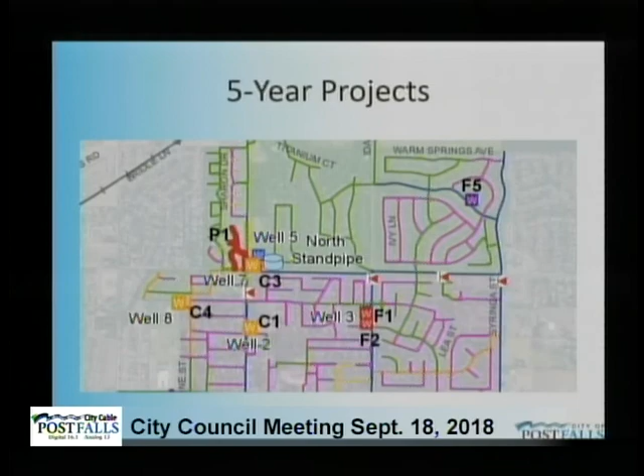This is a little bit north near the cemetery, where well 5 and well 7 are also located. You can see the P1 project located just to the west of that. That's basically upgrading pipes again within a subdivision to ensure fire flow.

You can also see projects F1 and F2 near well 3, an existing well at City Park. That's showing we need additional wells in order to meet the projected future needs of the water system. This is a project we're currently negotiating a scope on, and we'll be bringing that back to you fairly soon.

The last of the 5-year projects are piping projects on Beck Road and Pleasant View Road, basically extending transmission mains for water underneath the railroad tracks north of Seltice.

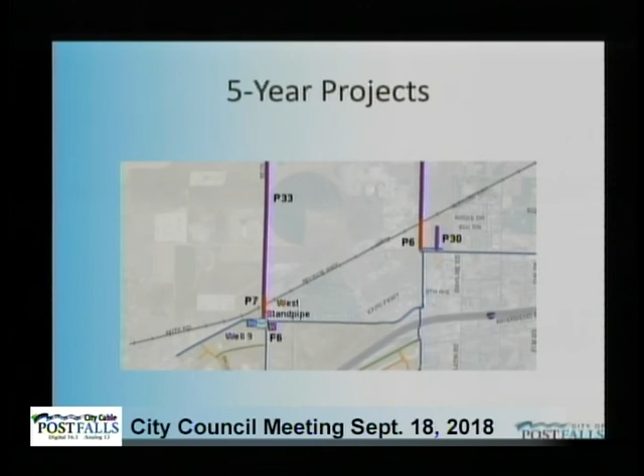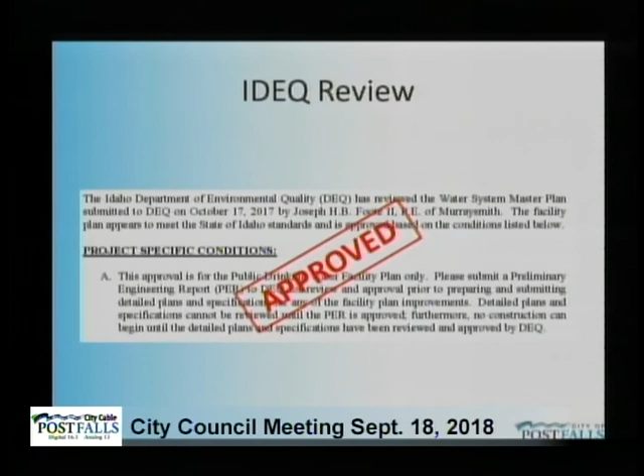I mentioned the Idaho Department of Environmental Quality Review. In order for a master plan to be adopted, the IDEQ must review it. What that allows you to do is go design projects, and when the project is brought back to them for approval, they know why you're working on it. IDEQ approved our plan after a decent amount of review time with no comments other than to make sure we tell them if we're working on a project.

And that is my short summary of the plan. I do have the full document with me, and I'm happy to answer any questions you may have.

Any questions of John? John, I noticed that in the plan, coming up in 2019 and 2020, we've got a large expenditure for a new well, and then there's a well rehab in 2020 and 2021. I'm assuming that's already built into those reserves. We're not going to come back to the citizens and say we've got to come up with an extra $2 or $3 million to do those wells. Is that correct?

Yeah, you are correct in that the assumptions within the plan are taking those projects into account, and that's part of what's spending down the reserves here. In addition, the projected 3% rate increase helps to fund those projects as well. Great, thank you.

Thank you. Do you need a motion on this from us tonight, then? There's a resolution later on the agenda. Thank you, John. Thank you for your time.

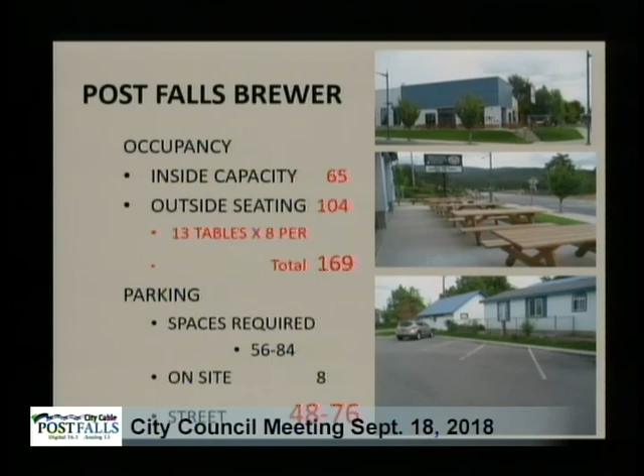That occurred when the Post Falls Brewery became very successful. Their occupancy inside is set at 65, outside they can seat about 104, so you have a total of roughly maybe 169 people there at any one time. I calculated that the space required for parking would be 56 to 84 parking spots, and on site at the brewery they only have 8. So the balance, 48 to 76, end up on the street, and that becomes an issue from a parking standpoint and a safety standpoint.

So I just wanted to give you a little bit of background.

And they used the city center parking plan. If I'd known there had been a meeting on that earlier today, I would have attended that meeting, but I didn't. I understand this plan is preliminary only at this point, and that was per Jennifer.

When you talk to the planning office, they claimed that the reason they only had to have 8 was because for them to have a permit on site, they relied on on-street parking. So that puts it all out on the street.

Might help if I turn the mouse on. Still not working. Maybe we have a dead mouse. Do we have a dead mouse? Oh, there it goes. Okay, thank you.

So the city did install a no parking sign. Let me go back one and see if that skipped one. Go back one. I'll just go back. Oh, use that. Okay, we'll go back one.

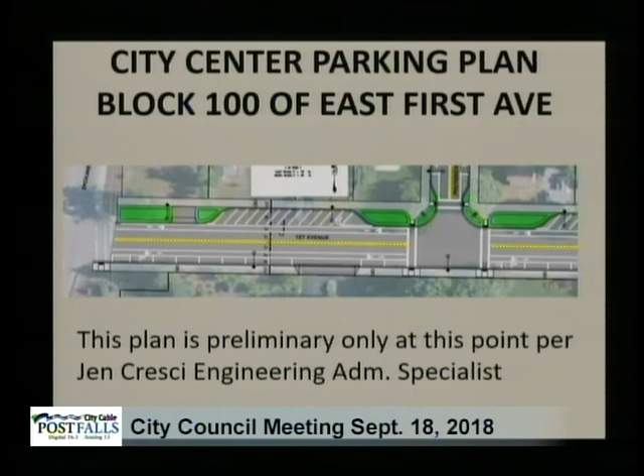If you look at that preliminary plan, you will see on the south side of First Avenue, they show parallel parking. Across from it, they show angle parking, and that looks like backing into parking in that area. Now, the plan that they used, the city has taken those steps to actually implement the street parking. So everything is flooded into First Avenue and also up onto Frederick.

And on the north-hand side, there's not even sidewalks, so people have to walk out in the street. Even people on the south side walk out in the street. But the issue I want to look at tonight is just the parking.

Am I going the wrong way? Sir, I just want to let you know I'm going to give you more time because you had issues, but it's a 5-minute limit, so your time is about... we'll give you an extra minute, but just so you know it is a limit of 5 minutes. What am I, down to 27 seconds? Yeah, we'll give you another couple minutes, so go ahead. Okay.

So the city did come out and put parking signs up. Originally they were small signs. They came out and put larger signs up with red flags. The parking goes all the way down to the fire plug there. And so from those 2 points, that's a no parking zone.

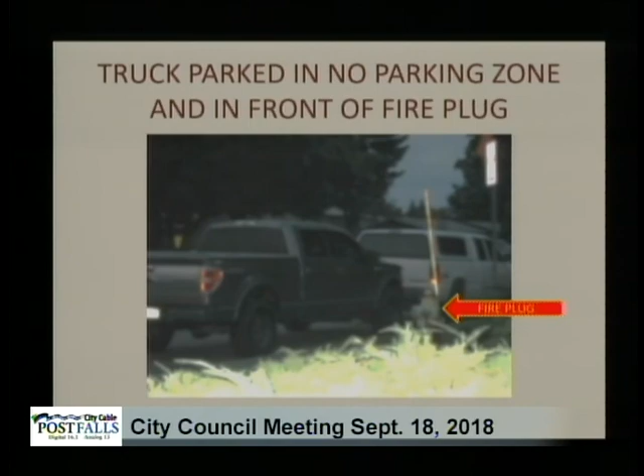Here's a car parked in the no parking zone, and this is where the safety issue comes into point. We cannot see the cars coming down First Avenue, coming off of Spokane Street. Just can't see them. So there's 2 cars that are parked, sometimes even out into our driveway. Here's 2 cars parked there. Here's a car or a truck parked in the no parking zone and even in front of the fire plug. Now, what can be done to resolve our safety issues?

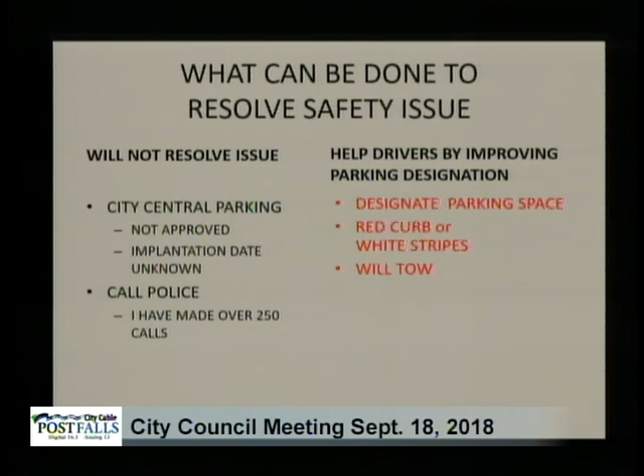Well, the city's central parking plan won't solve the problem right now. The implementation date is unknown. You don't know when you're going to implement that. Calling the police is not a solution because the cars, when they ticket them, may be there for another 2 or 3 hours. And so we still have the visibility standpoint where we cannot see to enter First Avenue. And calling the police really is not the solution.

I've called them over 250 times. They respond. A lot of times the cars may be gone, other times they're there. So some of those solutions, I think we need to help the drivers. It's a driver issue. It's not the brewery, it's not the city central parking plan, it's the driver.

And we could improve the situation down there by parking designation. One of them would be to designate the parking space. Another one would be a red curb or white stripes. Another one would be to add to those signs, will tow. Now, I think people would probably still park there.

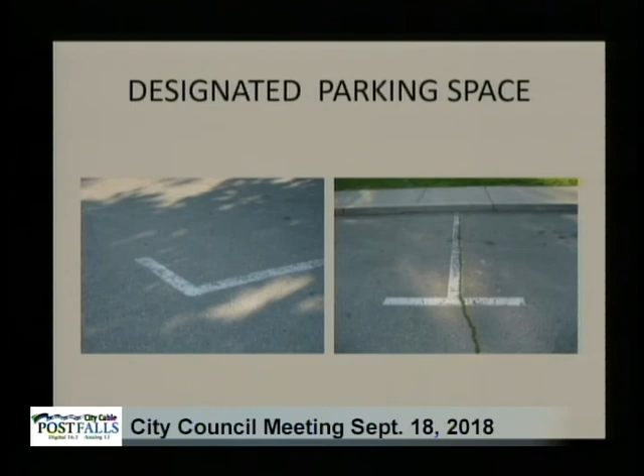So here's a designated parking space where you have like a T where it shows 2 parking spots. You could start it right there by Spokane Street where there is a no parking, and run it up to our no parking area, which would be like on the left the start of it and then the finish of it where they could park.

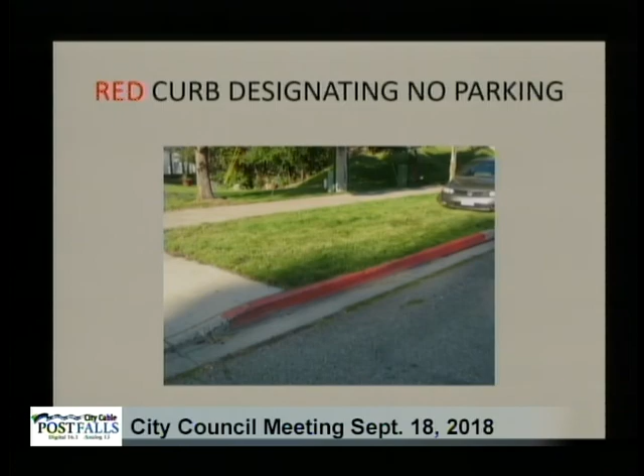The other option is to paint the curb red. Now, we've been told by the city several times we don't paint curbs red. Well, guess where this red is? It's on 4th Street, at the Falls Park Apartments. I've been down there several times. Nobody parks in that red spot. And I was told that was painted by the city.

We've requested that and been denied, but that would help solve the problem. The other one, also on 4th Street, is where they've got white stripes, and they've actually got a sawhorse there. I think on this particular one, it states it's backing in parking, so the other one would be vehicles will be towed. I think there's some people that would park there anyway, even just for a minute. So let's get it done, a team effort of what we can do down there.

This is something that really can't wait until the city's central parking is resolved or they do the planned parking down there on First. We needed immediate action on there. I can't tell you how many times it's been very close calls. So I just ask for some consideration within the right department to look at this issue. It is a serious safety issue that we have down there.

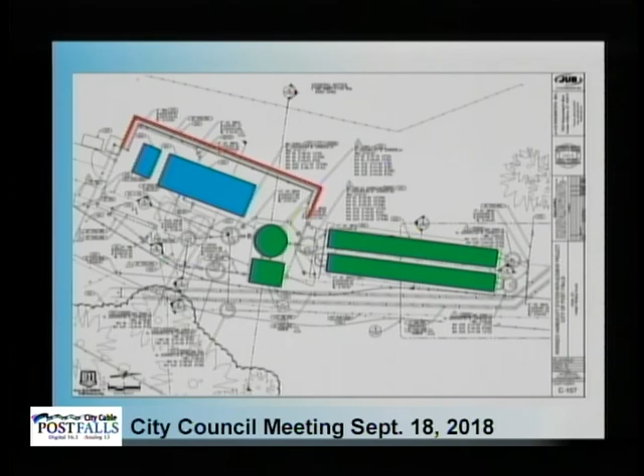The green circle and square is our new wet well and valve vault. It's worth noting that compared to our previous lift station designs, on this project we thought it would be a great fit to use precast structures, which had the benefit of an expedited construction schedule compared to a cast-in-place process that requires a lot more time.

And then the longer rectangular shapes—similar to that idea and principle of speeding up construction—the overflow basin will be constructed out of 5-foot diameter HDPE pipes connected together, as compared to a cast-in-place project.

You can see there's a lot going on in a small space. There are some site constraints. South of the shapes there is a through driveway that goes through the site, providing access for the HOA members to their community park, then exiting at the northeast end. During construction, we will separate this site from the HOA member site so they'll have access to their park throughout construction, and the contractor will be limited to this area only.

As I mentioned, we opened bids on September 5th at City Hall. We received 3 bids: Halmy Construction, TML Construction, and SNL Underground. The apparent low bid was from Halmy Construction, in the amount of $1,080,000.

Following the opening of the bids, JUB provided a review of the bids in compliance with the bidding requirements and documents. You'll note in the first column, the highlighted portion at the bottom next to HVAC, Halmy listed a subcontractor for the HVAC work that, after JUB's review, was determined not to be licensed to perform that work. The second issue identified in Halmy's bid is the absence of a contractor listed for plumbing. Under the Idaho Code, as listed in the bidding documents, it's required that a licensed plumber perform this work. Worth noting, TML Construction and SNL did list a plumbing contractor in their bid forms.

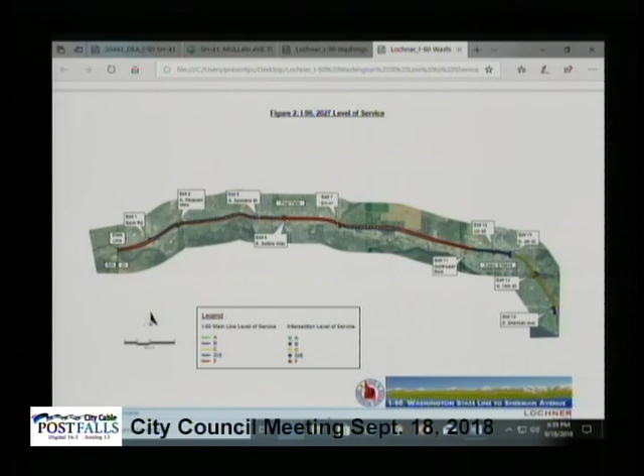The next slide is what the level of service is in 2027. You can see that it goes red, which is level of service F, stop and go traffic at our peak hours, AM peak, evening peak, and also what we're starting to experience is a third peak, which is a mid-afternoon peak. So that's dead stop, moving incrementally through the corridor.

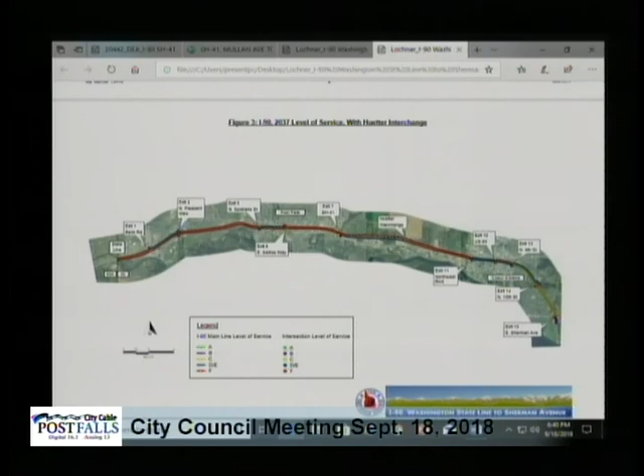And then moving on to 2037, this one would be with the Huetter build-out, the additional north-south route that is in our vision in the future, when we're not sure, but it is out there. It'll be a controlled access system that'll go from the interstate along Huetter up through the prairie and attach to Highway 95 up north, so it'll be that additional route north.

Some of the potential solutions are, we can go one by one. Solution D is to signalize the westbound off-ramp at Seltice Way. Another one further up the line is to signalize the eastbound off-ramp at 15th.

Next one, C, Spokane Street to SH41, add an additional lane. So here we go with our third lane on the interstate, so we can increase capacity on the roadway and start to see that level of service drop off.

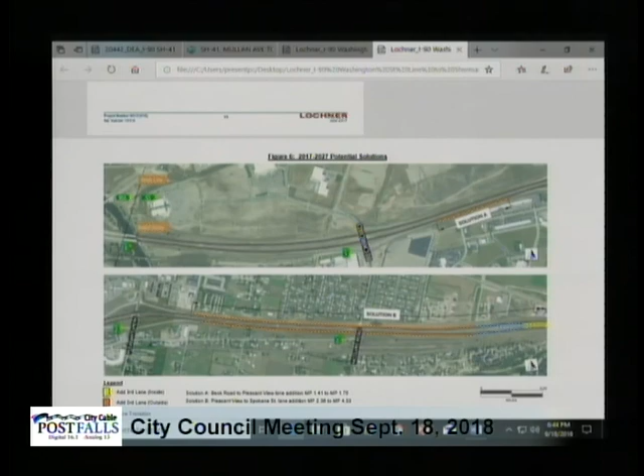This here is just some graphics of adding the third lane, and it's going to go on down the line. The first solution is, of course, at Beck Road to Pleasant View, adding a third lane there. That's solution A. Solution B would be from Pleasant View interchange to the east, a third lane on both bounds.

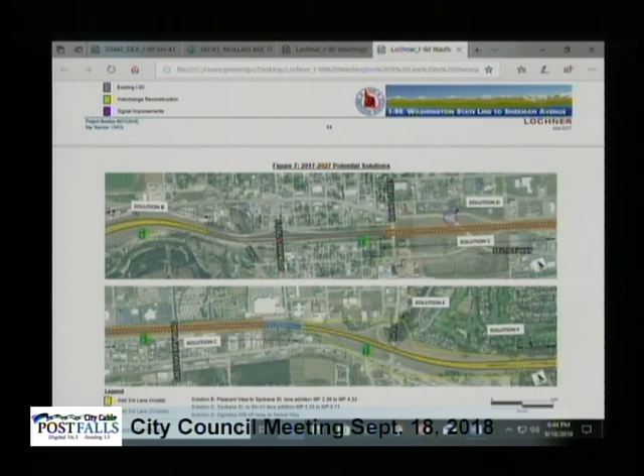And then this one here, Pleasant View to Spokane Street, that's the one we talked about, add the third lane. The orange is adding a lane to the outside, yellow adding it to the inside. We do have some issues with some structures out there that'll have to be widened as well to address that.

2017, 2027 potential solutions, and again, it's about funding. How are we going to come up with the funding to do 15 miles of a third lane on the interstate?

Pleasant View, or Pennsylvania and Sherman, we're getting further east. So I'd just like to show Mr. Mayor and members of the council that we are looking at what to do and how to address the problems that we're experiencing on the interstate already.

It is in the future. It's a matter of when, it's going to happen, not if. It has to happen. We're looking at projected volumes out here, just in the Post Falls urbanized area on the interstate, in 2037 of nearly 100,000 vehicles on the interstate as an ADT. That's one day, an average annual daily traffic. We're looking at 100,000 vehicles. Right now, we're experiencing in the summer months, I think the high this year was around 68,000. So it jumps drastically.

We have a public meeting tentatively scheduled for November 7th, somewhere in that week, to present our preferred alternative or alternatives to the public, and then another one scheduled in the summer of 2019 after preliminary design.

Right now we hired DEA to perform the design and alternatives analysis for us. We started with 8 different alternatives, and this week we're doing a value engineering session to pare down our alternatives to about 2. We have several local stakeholders involved, including Bill and Rob from your engineering department. They've been there and plan to be there for the rest of the week.

We're evaluating alternatives based on safety and operations, because this is really primarily a safety project, and we want to make sure it's something that will operate well in the future. After that, we're looking at what fits those parameters with the least amount of impacts and the most cost-effective cost-benefit ratio. Our total impacts aren't known yet, but we're fairly low impact on the alternatives we're considering right now, and we'll still accommodate Seltice as an east-west arterial, 41 as a north-south arterial, access between them and I-90, and bike and pedestrian movement throughout.

So I wanted to show you 4 of our alternatives tonight. These are pretty much almost napkin sketches at this point, so there's still a lot of tweaking and optimizing we can do on all of these. But I want to show you the direction we're going with this. The first alternative is more of a system interchange, like you'd see between two interstates. Does this have a laser on it?

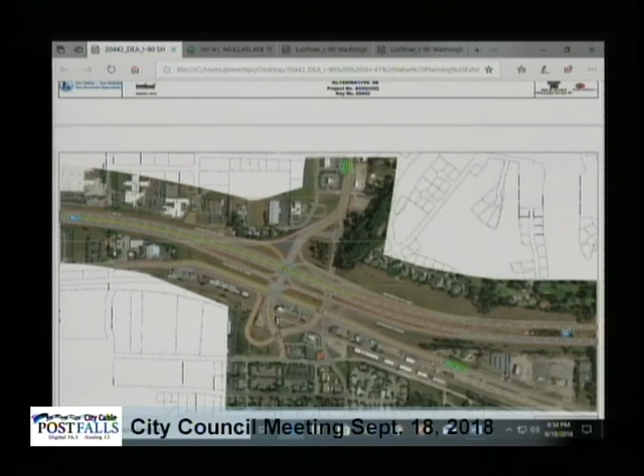Then the last one utilizes what's called a single point urban interchange. It's very similar to what we're putting in at 53 and 95. Boise has also put several in. It's kind of an up-and-coming interchange design because it works well in these built-up, tight environments, because you control the interchange from one signal, so the signals perform better throughout there.

Key functions of the several different SPUI types we're looking at is that we'll take Seltice through traffic up and over 41 to maintain that more efficiently, and then the rest will be diverted down through some sort of jug handle around Herborn or Ross Point. That's all still being optimized because there's a lot of tweaks we can do there, and we're working closely with Rob and Bill to look at all those impacts.

So that's basically where we're at on 41 in a nutshell. We'll have a public meeting early November, so that notice should be coming out shortly, where we will present the results of our value planning session to the public before we make a final decision on our alternative type.

So if you guys have any questions on this before I move into some construction... Just remember last time we looked at about 7 different alternatives. I know, so hopefully these will work out better. Yeah, and that's really kind of one of our goals too in this, is to do it right, so we aren't coming back here again in 10 years to say, okay, this didn't work, what are we going to do now?

I wanted to update you on a couple of construction projects we have on our system in Post Falls. The first is a bridge repair project. Braun Jensen out of Payette is doing it for us. It's a 2-season job. The first season we're building crossovers at Huetter for next year, out by the weigh station there. We've got all that earthwork going on, and we're also resurfacing bridge decks in Post Falls.

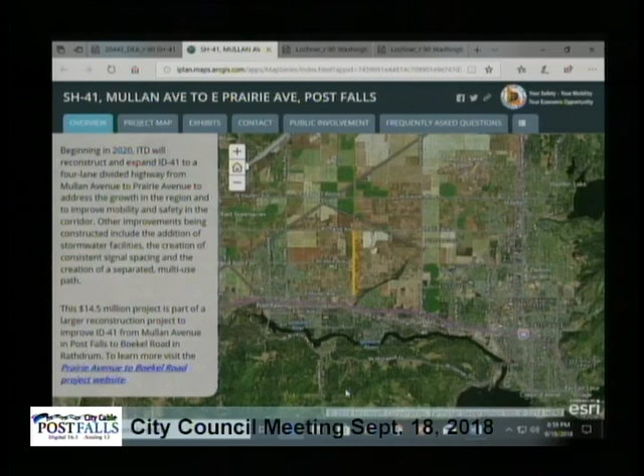So we can move on to SH 41. I just put this on here, a link to our public-facing website, and it'll give you information on the projects themselves. There's actually 4 projects out there: Mullan to Prairie, Prairie to Lancaster, Lancaster to Boekel, and then a signal at the intersection of 41 and Lancaster.

What we're doing out there is going to a 4-lane divided median system, signals on the half-mile, with some placed during the project in 2020. A lot of the roadway and infrastructure within the Post Falls city limits will be constructed back 1,000 feet on either side of the roads as well, the signalized intersections and also some at the quarter mile.

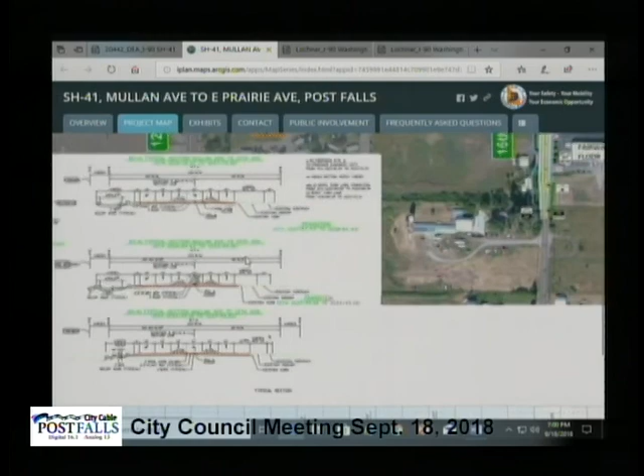This site will give you a project overview, the project map, and it'll allow you to zoom in on the particular intersections and the typical sections of the roadway itself. The portion from Mullan to Pole Line won't have a grass median, it'll be a raised median divider out there.

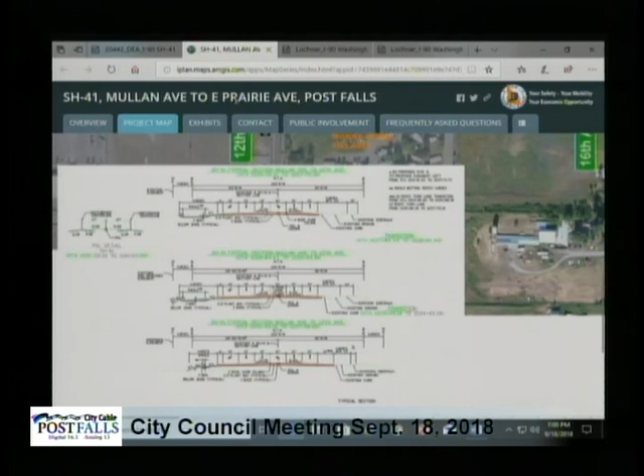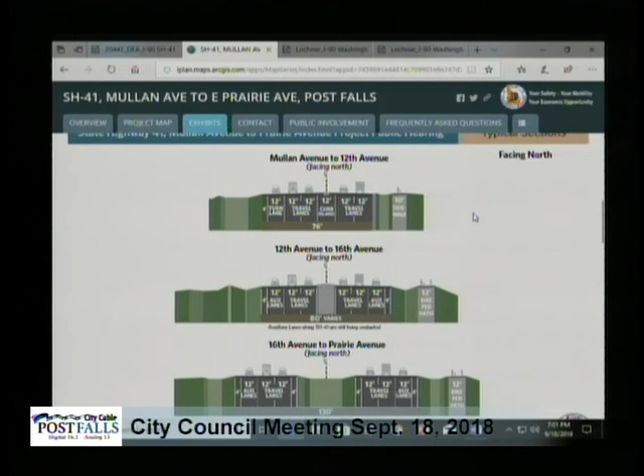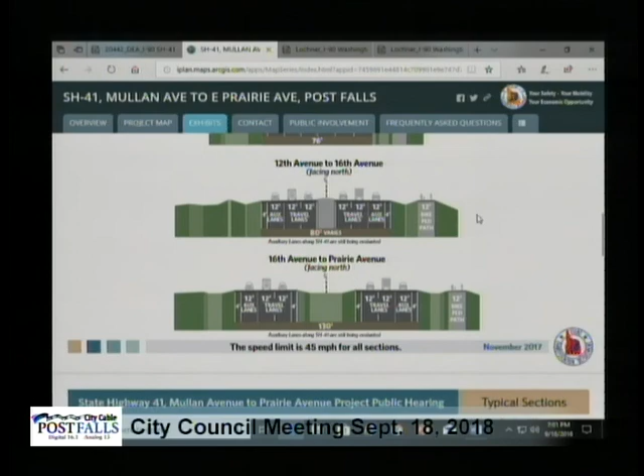So we've got some exhibits of the project. Here's our typical section from Mullan to 12th: 12-foot travel lanes, sidewalk, shared use path between 12th and 16th. Then continuing up past Prairie, there will be a shared use path on the east side of the roadway for the length of the project.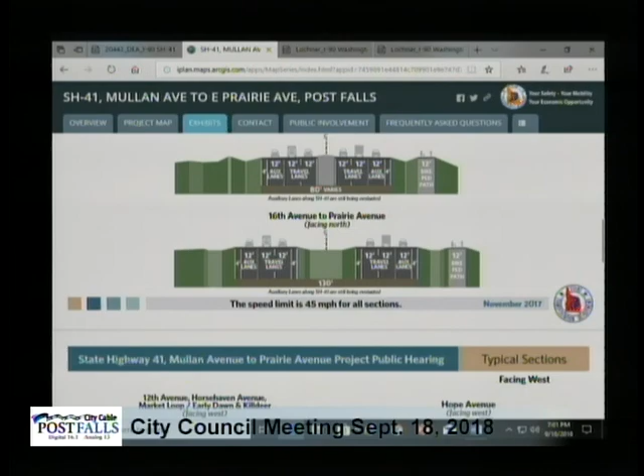We did get a freight grant to build a grade separation at the UPRR main line, so we won't have to deal with that crossing, stopping when the train has it active. We're in the process now of working with the AmeriGas facility on Prairie on shutting down the spur line that bisects 41 as well. So with the elimination of those two crossings, it'll be a clear shot all the way up to Rathdrum.

So I've got another one. I don't see the other one here. Anyways, I have another link to the other projects to the north. This one's just Prairie. Hey Rob, I don't see that one here. Is the Word doc open? Oh, here it is.

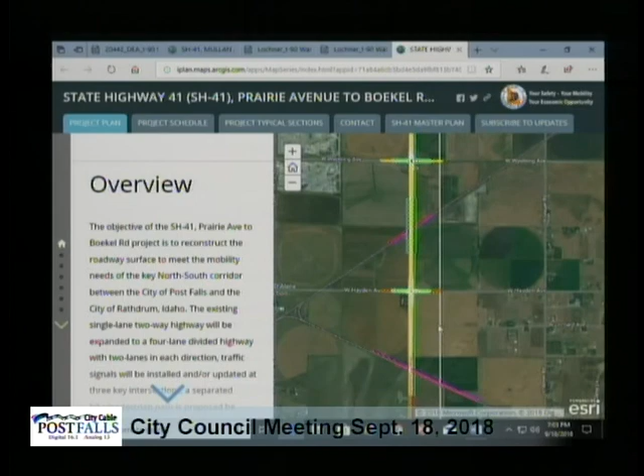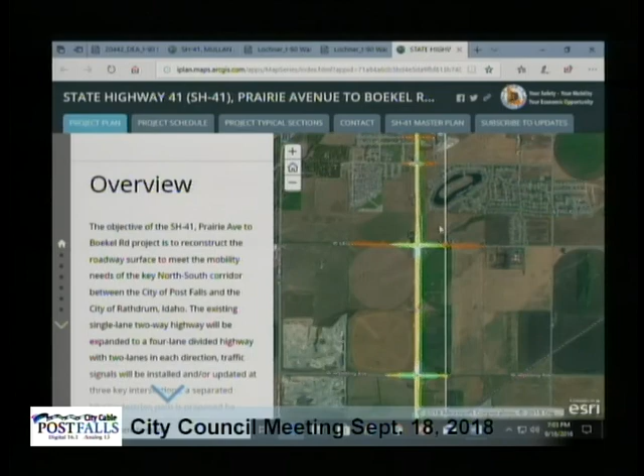There's the Prairie to Boekel section, which starts at Prairie there, and then the signalized intersections. We'll be replacing the signal at Hayden. No signal at Wyoming at this time. Signal at Lancaster, signal at Nagle, and a PED tunnel at Nagle is planned for the project. And then we'll be terminating the project at Boekel.

And we've had a lot of questions about the southern portion from Seltice to Mullan, which is going to be addressed in the planning stages, in the early design of the interchange. We're required to look at that section, and we have funding programmed for that for 2025, so those projects should overlap as well.

John, am I missing anything? I think you covered it, I think the biggest point that was brought up is it's still on track for right of way.

Any questions? I was just going, when I was looking at, so the bike trail will be on the east side, 41 then, just one side? On the east side. Okay, yep. Al?

You mentioned the port of entry, moving the port of entry. Why is that necessary?

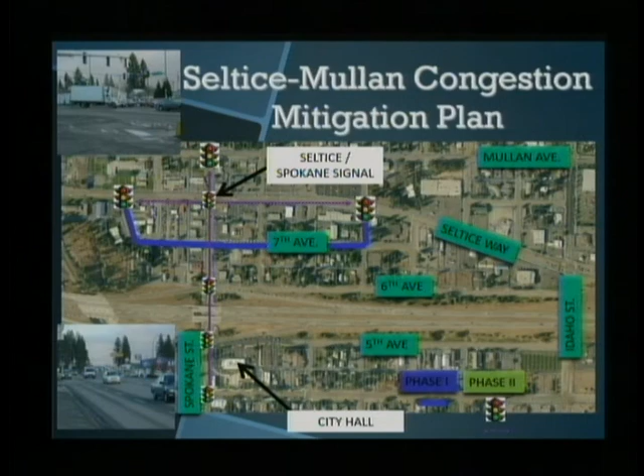Phase 2, which we have under construction right now, involves the construction of 3 traffic signals at Compton and Seltice, Henry and Seltice, and then Mullan Avenue and Spokane Street. Phase 2 also involves the placement of fiber optic cables to connect those 3 traffic signals, along with 4 existing traffic signals to here at City Hall, where we will have the ability to access those signals, make modifications to timing, and monitor them if there's a complaint about traffic backups to see why that's going on. That will also be able to be done down at the street department, as well as we are trying to work with the Idaho Transportation Department so that they can also monitor those signals.

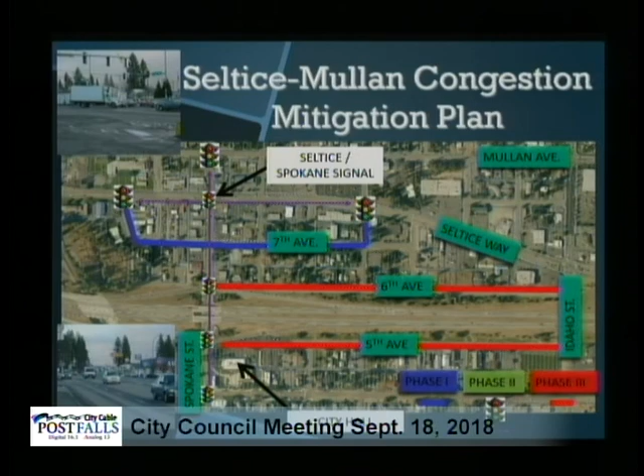4 of those 7 signals will belong to ITD at the completion of this project, and the other 3 belong to the city. Phase 3, per the Seltice-Mullan Congestion Mitigation Plan, was to make some modifications on 6th and 5th Avenue. Our 2017 Transportation Master Plan update indicated some alternative solutions which may be more cost-effective and have a better return on safety and efficiency of the transportation system. We will be looking at trying to get that started in 2019 as far as planning level, coming up with a good plan and the cost on that.

So where are we today on the Seltice Mullan or Seltice Congestion Mitigation Project? Planning started in 2008, design started in 2012, and we finally got to construction and had funding approved to go out to bid this year.

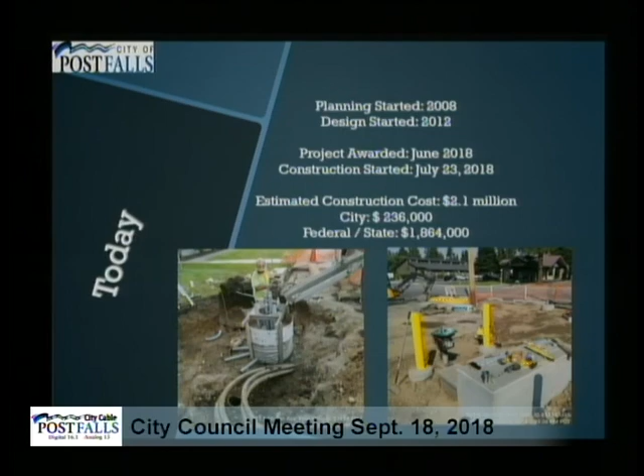Construction started July 23rd, with an estimated cost of $2.1 million, of which we are participating from our transportation impact fee dollars about $236,000, or roughly half the cost of a normal traffic signal. We're getting 3 traffic signals and a lot of communications capability and modern technology to operate these signals.

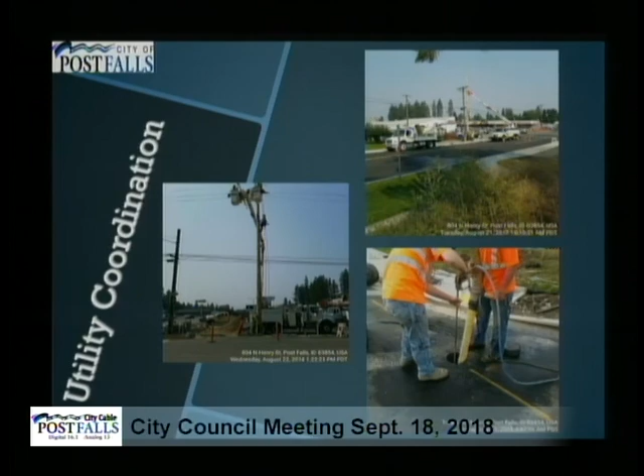So far, our contractor over the past couple months has been doing a lot of utility coordination work. There's been some new power poles that have had to be put in, raising power lines so they're out of the way of traffic signals. Fat Beam, Frontier, Spectrum, Avista, they've all had wires that they've had to relocate and move.

Underground work. A lot of the work that we're doing this fall is stuff that's going to be underground. People aren't going to see it or really even notice that it's even there when it's done. We're putting in foundations, putting in vaults, a lot of concrete underground. And then there's miles worth of fiber optic communications. It may be a short distance between City Hall and Spokane Street and Seltice Way, but it still takes a lot of fiber optics to communicate and connect to all those signals, get around the corners.

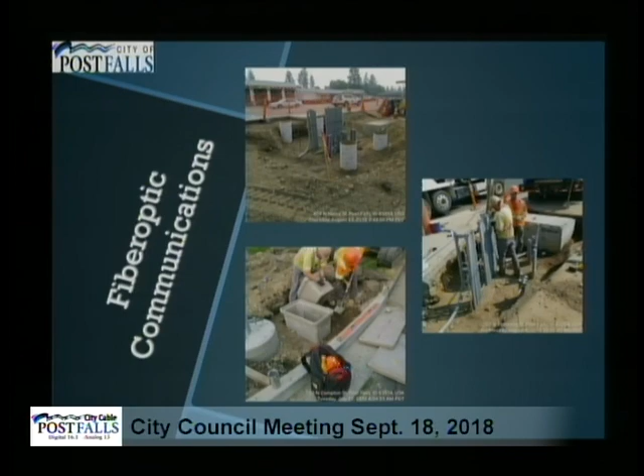ITD did a lot of front work back in 2014. They laid a backbone line from 4th Avenue all the way up to Mullan Avenue, which has helped keep the costs a little bit lower on this project, even though it is $2.1 million.

Surface repairs are also going on. We're modifying some of the curb returns so they can fit the desired design vehicles. And then as they put in their fiber optic communications and foundations, they have to modify storm drains and get everything back to a good operational condition prior to this winter.

One of the drawbacks—well, actually, as you're doing a project in a downtown area, sometimes we find historic artifacts. Over at the intersection of Henry Street and Seltice, we started digging down to put in a foundation for the traffic signal. We found underneath the section of roadway that we were tearing out an old dry well, right at the location where we wanted to put in a signal foundation. Why back in the 1980s when they did some work in that area did they put the road over a dry well and never fill it in? I don't know, but it's good that we found a potential future liability and got rid of it.

The other item: one day I was at a meeting with our consulting engineer who's doing the inspection work, and they got a call from the contractor saying the contractor hit something. They don't know what it is, but it's big. I said, well, what's going on? They tried to move around it, but they hit it again. I asked, are they at the intersection of Seltice Way and Spokane Street? They said yeah, how'd you know that? I said, I bet they hit the old pedestrian underpass.

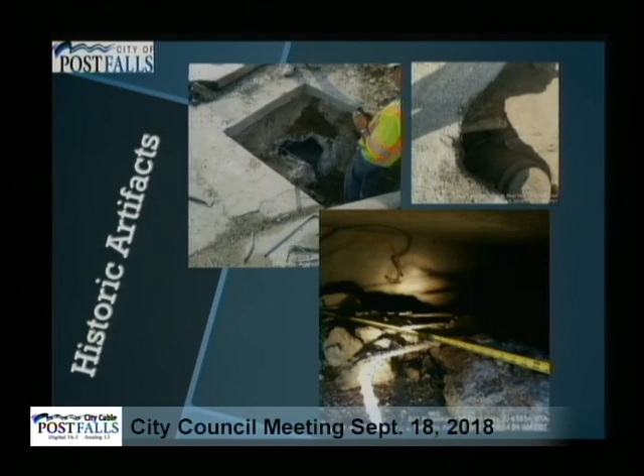Our best guess is that back in the 1930s or early 40s, there was a pedestrian underpass put in on Seltice Way at Spokane Street. Right now, that is underneath the southbound right lane. It is still hollow. They happened to hit the concrete wall of it about where the steps are at. ITD wasn't fully aware that it still was there, so we've brought it to their attention, and that is a liability which they are going to be working on and programming to get filled in so that it's not a future sinkhole. But it is neat to find and take a look inside that lower right-hand picture—looking inside, it is hollow. It's dark, it's dirty, but it's there, 8 feet wide, 10 feet tall.

So our next steps: we need to finish the underground and surface work. That's projected by November of this year. The contractor's a little bit ahead of schedule, but I'm holding them to their schedule on this of being November.

Installation of the traffic signals themselves is planned for the fall of this year or early spring. As soon as they got the project award, they ordered the steel for the signal poles, but they were told it was about 24 weeks out, almost half a year. So they're anticipating it in late November, early December of this year. As weather allows over the winter, they'll put up the signals, then turn them on, and then there's about a 3-month period where they will be calibrating the signals.

We are trying to use something called adaptive technology, where we utilize actual conditions on the roadway, how many vehicles are going through at a given time, to determine what type of timing program should be done. We also look at actual operation performance of those signals on a daily and weekly basis, to find ways to improve efficiency. For example, if one southern leg has extra green time with no vehicles going through, we can take that time away and give it to another movement at that intersection.

We're trying to squeeze everything we can out of Spokane Street and Seltice Way in this area without having to get into right-of-way acquisition, putting in more lanes, or getting rid of businesses.